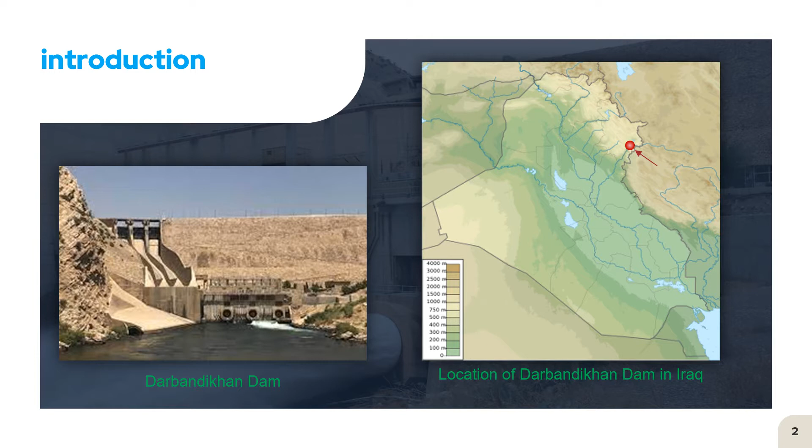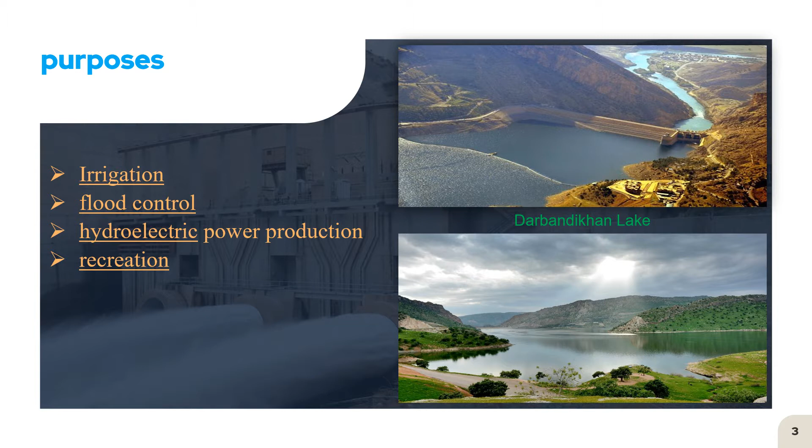Due to poor construction and neglect, the dam and its 249 megawatt power station have undergone several repairs over the years. A rehabilitation of the power station began in 2007 and was completed in 2013. The purpose of this dam is irrigation, flood control, hydroelectric power production, and recreation.

Harza Engineering Company of USA, designed the dam. Construction began in 1956. The reservoir began to fill in November 1961. The dam was completed that same year.

After the reservoir filled, several problems occurred. In 1967, there was a major slope failure about 100 meters upstream of the dam. This and other slope failures are continually under repair.

The bedrock beneath the dam has to be regrouted, and the crest of the dam settled too much, requiring it to be repaired. The riprap on the upstream face of the dam was also repaired in 1999 and 2000.

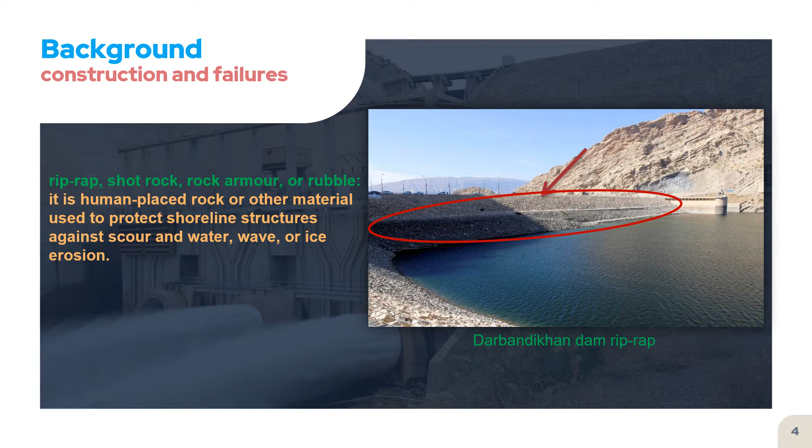As you see in the figure, riprap, rock armor, or rubble, is human-placed rock or other material used to protect shoreline structures against scour and water, wave, or ice erosion.

Between 1983 and 1985, the dam's power station was replaced by German and Japanese companies. The original 2 by 800 kilowatt generators were replaced with the current power plant's 83 megawatt generators. The generators were commissioned in 1990, after the political situation in the country calmed.

When subjected to higher pressure, these cavities, called bubbles or voids, collapse and can generate shock waves that may damage machinery. These shock waves are strong when they are very close to the imploded bubble, but rapidly weaken as they propagate away from the implosion.

New spillway gates were installed between 1989 and 1990, after they were removed in 1988 because of the Iran-Iraq war. During the war, the spillway and substation were damaged from bombing. The power station was damaged from bombing in 1990 as well.

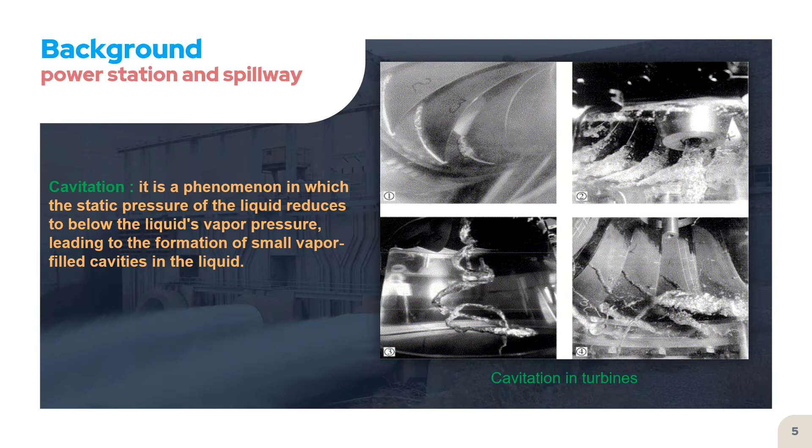In 2007, the World Bank began a 35.36 million US dollar project to repair the Darbandikhan and Dukan dams. Repairs to the Darbandikhan dam cost $18.85 million and were completed in 2013, resulting in improved availability.

The dam is located within a gorge on a foundation of sedimentary rocks. It is a rock-fill embankment type with a central clay core. The dam is 128 meters high and 445 meters crest long. Actually, it is 535 meters long if the spillway section is included.

Its crest is 17 meters wide, and at an elevation of 495 meters, the structural volume of the dam, including rock, clay, and filters, is 7,100,000 cubic meters.

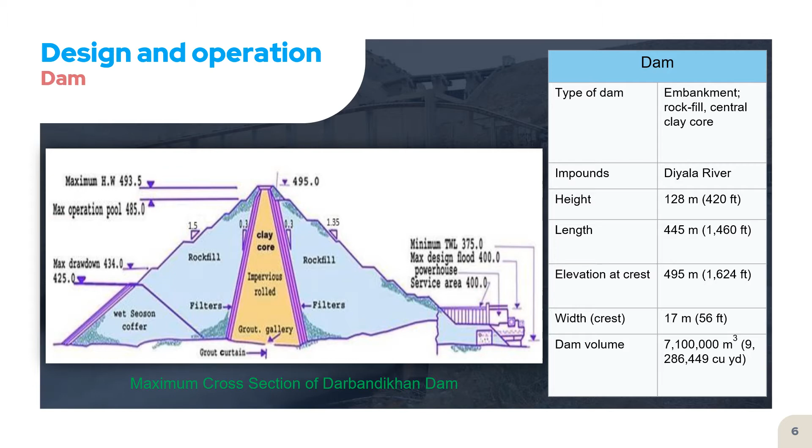The dam collects water from a catchment area that covers 17,850 square kilometers. Its reservoir, by design, has a storage capacity of 3 cubic kilometers. At normal pool level, at an elevation of 485 meters, 2.5 cubic kilometers of that capacity is active or useful storage, while 0.5 cubic kilometers is dead storage.

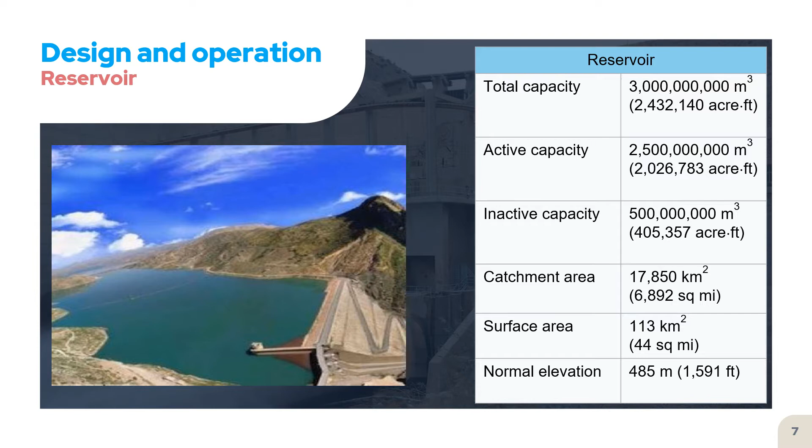However, due to 57 years of sedimentation, the current total storage volume is less than the design one. Now it's about 2.5 cubic kilometers. At normal elevation of 485, the reservoir covers an area of 113 square kilometers.

To protect the dam from flooding, it is equipped with a controlled chute spillway on the right abutment adjacent to the dam embankment. It is controlled by three 15 by 15 tainter gates.

The maximum discharge capacity of the spillway is 11,400 cubic meters per second.

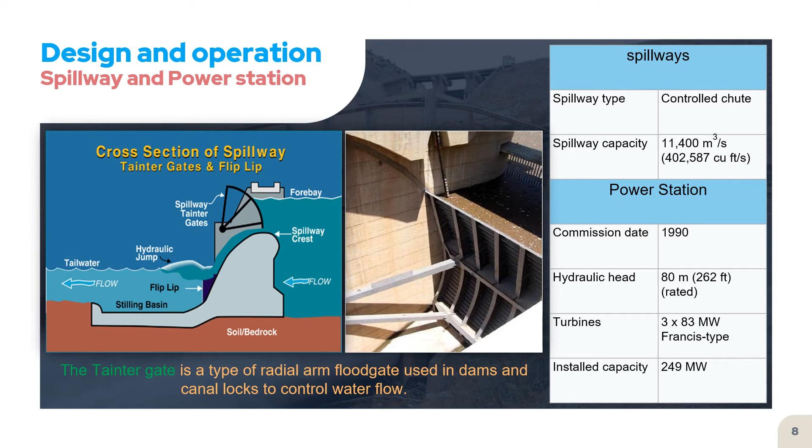The dam's power plant is located at its toe and contains 3 of 83 megawatt Francis turbine generators. They are each afforded a rated hydraulic head of 80 meters and can each discharge 113 cubic meters per second.

Above the tail race for each turbine is an irrigation outlet. Each of the 3 outlets can discharge up to 175 cubic meters per second downstream.

As you see in the figure, the Francis turbine is a type of water turbine. It is an inward flow reaction turbine that combines radial and axial flow concepts. Francis turbines are the most common water turbine in use today and can achieve over 95% efficiency.

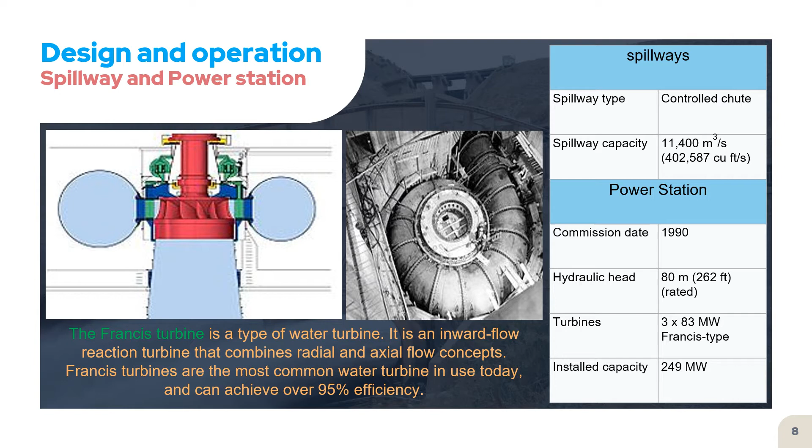During earthquakes, the earth crust vibrates in all directions, both horizontally and vertically. For embankment dams, earthquakes may cause lateral and longitudinal deformation in the dam, which in turn may cause settlements and form longitudinal and transverse cracks.

The damage and deformations occurring due to earthquakes may lead to near failure or even full failure. The settlement may cause freeboard reduction, which in turn may lead to overtopping risk. The longitudinal cracks may lead to dam slope instability.

The transverse cracks may cause initiation of internal erosion and dam failure due to piping, depending on whether there are adequate filter zones to stop the erosion. Accordingly, one of the most serious problems for dam engineers and the public is dam safety under strong earthquakes.

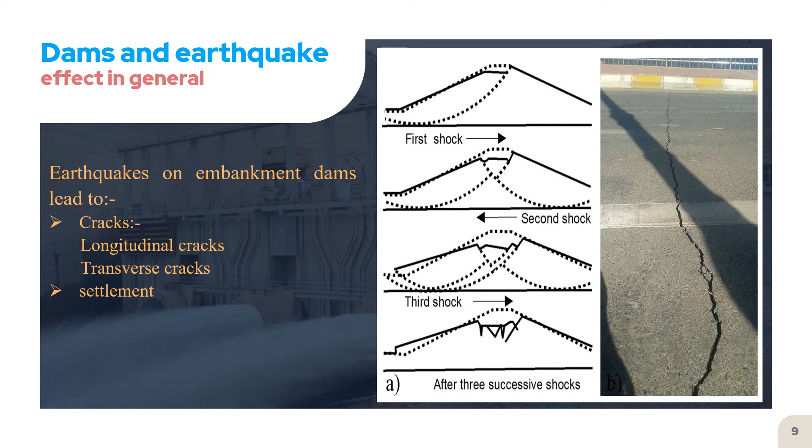A strong earthquake with a moment magnitude of 7.3 occurred on 12th of November 2017 near the Iran-Iraq border, 220 kilometers northeast of Baghdad, Iraq. According to USGS 2017, it was the most disastrous earthquake that has affected the Iran-Iraq border since 1909. The earthquake lasted for about 30 seconds, which is a long duration.

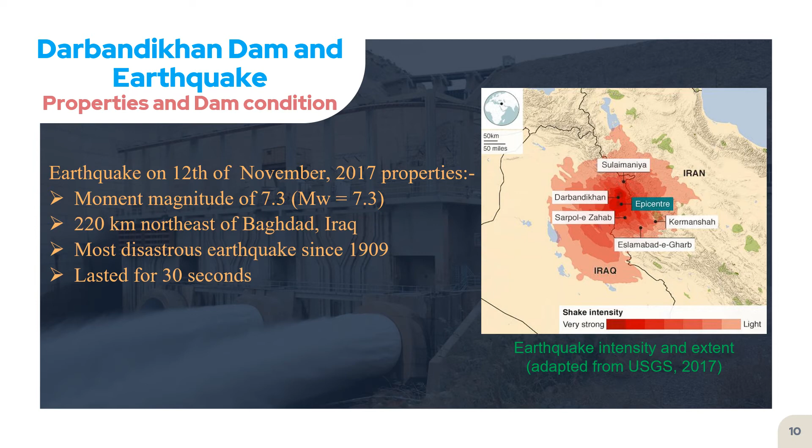At the time of the earthquake, the water level in the reservoir was at elevation 471.92 meters, about 13 meters below the normal operation level, and about 23 meters below the crest. Furthermore, the reservoir level had been low for about 6 months prior to the earthquake. Therefore, the upper embankment materials can be considered as non-saturated at the time of the earthquake. However, the embankment experienced notable deformation at the crest.

After the earthquake, many experts, engineers and geologists immediately visited the dam to check its safety and provide instructions for dealing with the new situation of the dam. As an instant safety measure, the reservoir water level was gradually reduced during 1 week, about 1.9 meters.

The data was collected in two stages: visual inspection and detailed inspection. The aim of the survey was to determine the locations of cracks, displacements, and abnormal appearances caused by the earthquake. The horizontal and vertical offsets of cracks were measured. The movements and settlements were determined relative to control points located on bedrock.

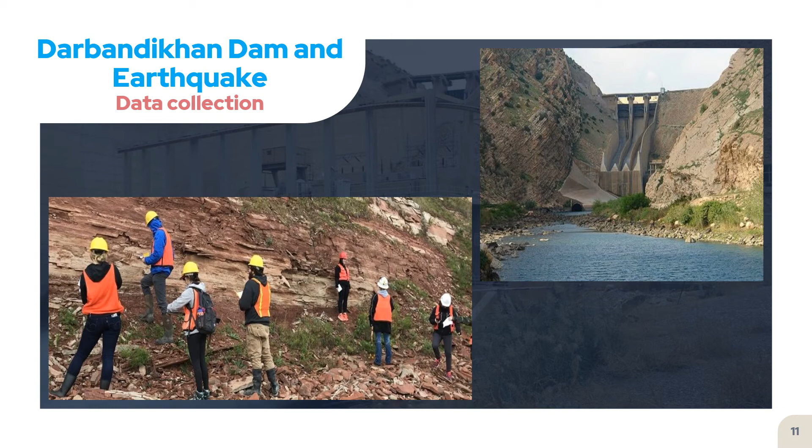The cracks that occurred due to the earthquake were mostly along the crest of the dam, running mainly in the longitudinal direction, which is the most common type in dams subject to earthquakes, and some transverse cracks at the abutments, which are the most dangerous ones, posing a greater threat to the safety of the dam.

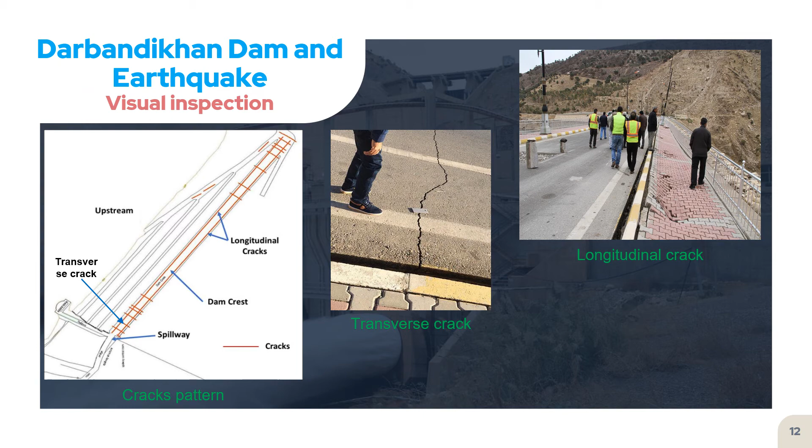The maximum width of the longitudinal cracks is 14 centimeters. The width of the major transverse crack that occurred in the clay core next to the spillway structure was about 16 centimeters.

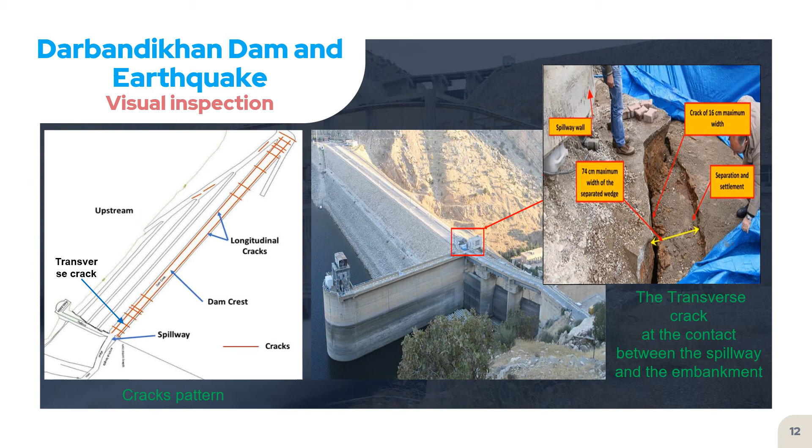So, the estimated depth of the major crack should be between 2.4 and 11.6 meters from the top of the clay core, meaning it may go down from elevation 490.6 to 479 meters. However, there were no differences in elevation between the two sides of the transverse cracks on the crest of the dam, except for the one next to the spillway wall.

The maximum crest settlement was about 48 centimeters and increased immediately after the earthquake to 61 centimeters after 13 months. The increased values in settlement can be attributed to either dissipation of the increased pore water pressure due to the earthquake, or due to the post shocks.

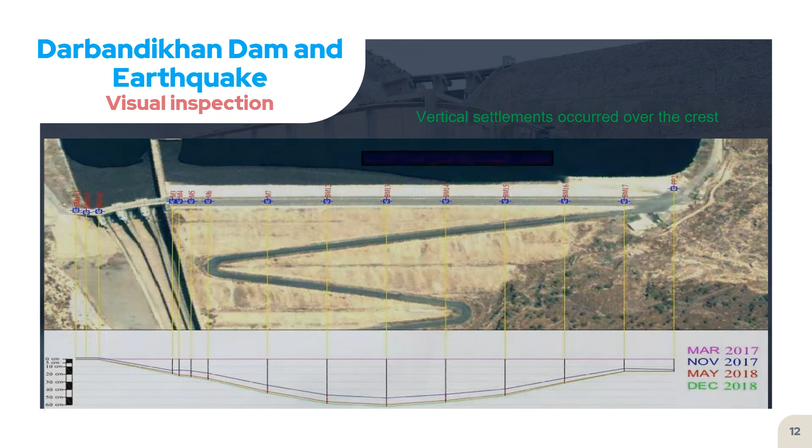Many fallen rocks from the high, steep mountains surrounding the dam were observed on the crest of the dam, especially near the abutments. The size of the rocks ranged from a few centimeters to more than 2.5 meters in diameter. The cracks and fallen rocks were then documented.

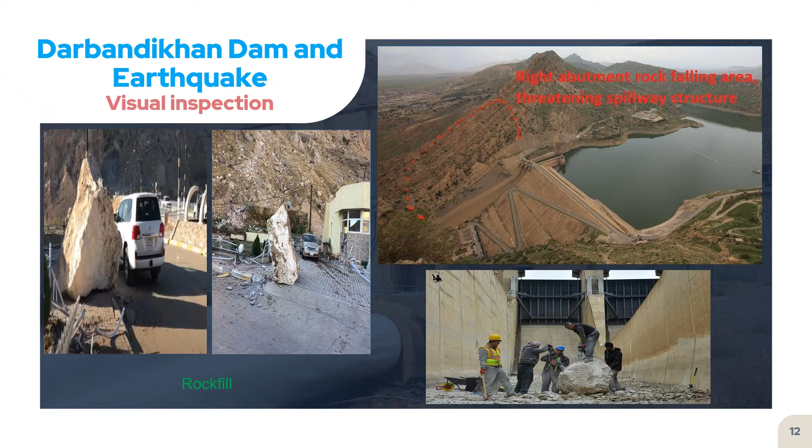Several test pits were dug at the crack locations. All the cracks on the crest were superficial cracks; they only penetrated the upper 2 meters of the road subbase on top of the dam. The cracks hadn't penetrated the core, except the transverse crack next to the spillway.

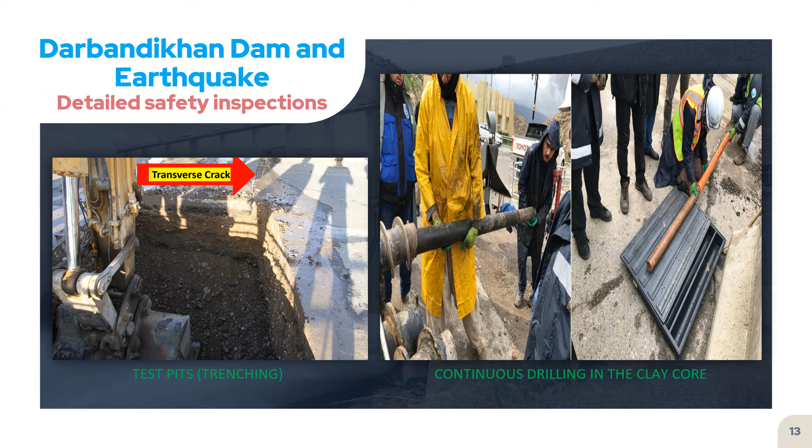In order to check the condition of the clay core in the area close to the spillway, 3 boreholes at 3 locations close to the spillway were drilled using a continuous drilling method. Visual inspection was then carried out on the extracted cores. In addition, to check the strength of the clay core, an in situ test was carried out on the clay core samples using a pocket penetrometer instrument.

Once the safety of the spillway and the bottom outlets had been checked, the water level in the reservoir was then gradually lowered 7.9 meters, from elevation 471.9 meters to elevation 464 meters, over about 2 months, in order to investigate the lower parts of the dam and to reduce the water pressure applied to the dam.

Due to awareness and caution about whether there were cracks in the lower parts of the dam or not, the water level wasn't allowed to rise above elevation 470 meters during 2018.

However, in 2019, based on the results obtained from the drilled boreholes and on prior information regarding the behavior of earth core rockfill dams (ECRD) subject to major earthquakes, it was decided to gradually raise the water level in the reservoir. The decision to raise the water level in 2019 was based on academic findings and observations.

This is mentioned in Pells and Fell, 2002. The upstream and downstream wide cohesionless filters will contribute to the crack filling, or self-healing process, if any crack exists in the core.

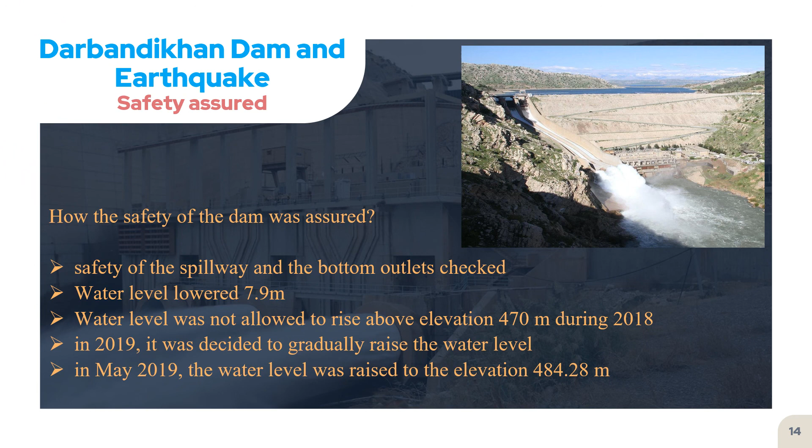Based on the deformations caused by the earthquake, the dam suffered minor to moderate damage. In addition, based on the UNSW method for assessing the probability of piping failure, since it was designed and constructed adequately, the Darbandikhan Dam has a low chance of failing by piping under static conditions.

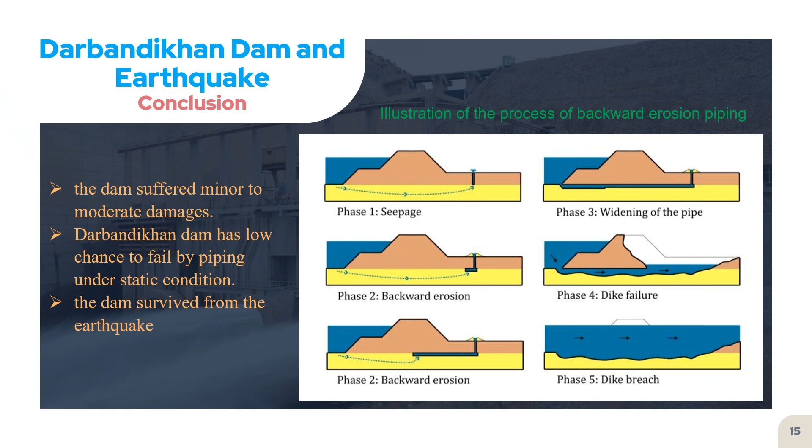Furthermore, at the time of the earthquake, the water level in the reservoir was low. Therefore, the dam performed satisfactorily and survived the earthquake.